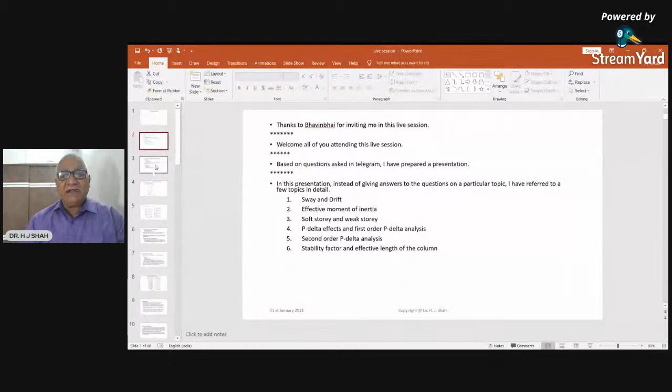When you consider a building, primarily we have two types of loads: vertical loads including dead loads and live loads. Because of this, there will be displacement, and vertical displacement will be represented by shortening in the column. If there is tension, there can be tension elongation. Horizontal displacement of the columns is represented by means of buckling.

There will be horizontal loads also, like wind loads and earthquake loads, and for that the displacement will be horizontal, and that will be the total sway of the building or sway of the column.

For example, if this particular column is subjected to vertical load, you can see there is buckling. This buckling can be small - even for a small load, theoretically there will be buckling. So when the load is small and the height is smaller, this buckling effect may be small, or it may be considerable.

So now these two words are very important: considering small or considering considerable. When it is small, you consider it as a short column, and when it is considerable, you will consider it as a long column.

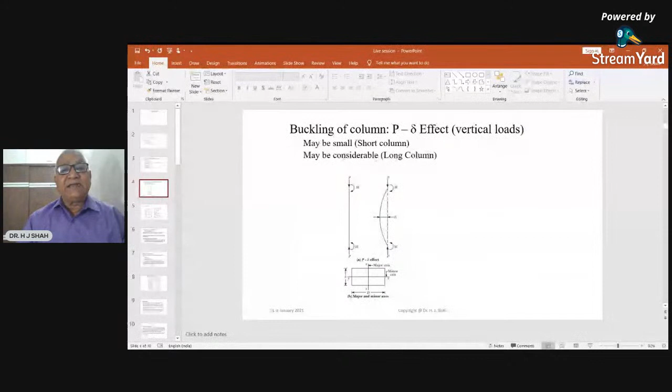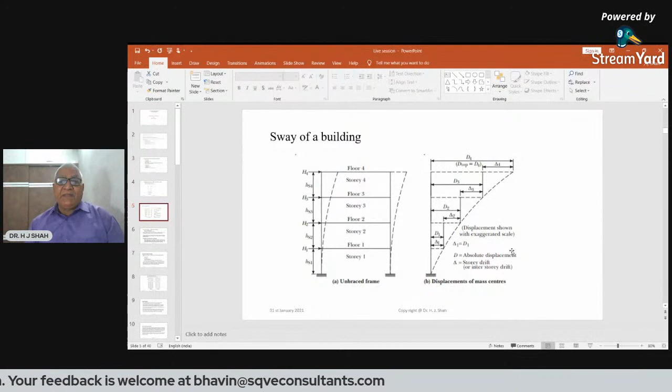You can see whatever these bendings are, D1, the displacements D1, D2, D3, and D4, are called absolute displacement because they are calculated with respect to this vertical line. But suppose if you consider any particular floor, say story number 3, then D3 minus D2 gives you delta 3, and this is called the drift of the third floor, and so on. So this is the meaning of sway.

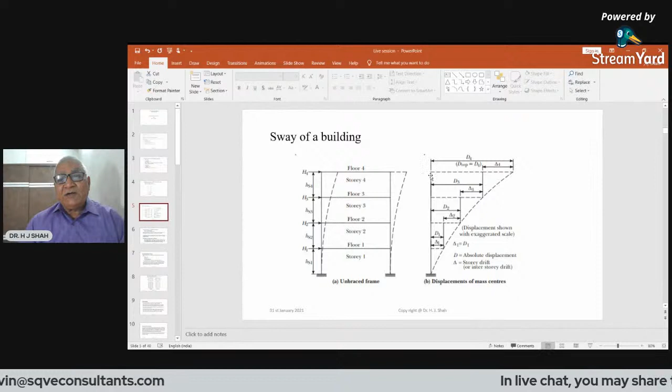Total sway is the sway of a particular point with respect to a fixed point, whereas the drift is nothing but the difference of displacement of the top and bottom of the stories.

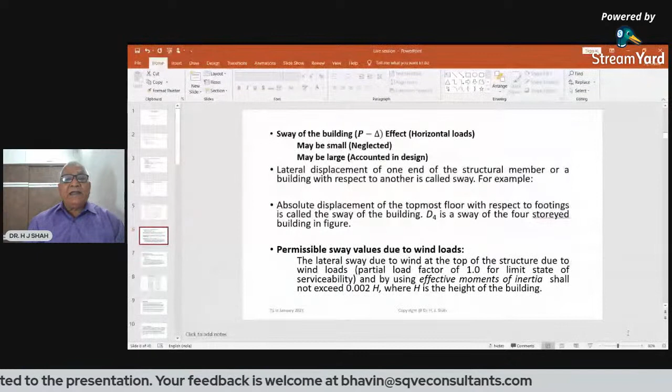This sway may be small or it can be large, similar to the buckling. Buckling may be small and may be large. In the same way, the sway also can be small or it can be large. When it is small, we can neglect it. When it is large, we have to take it into design.

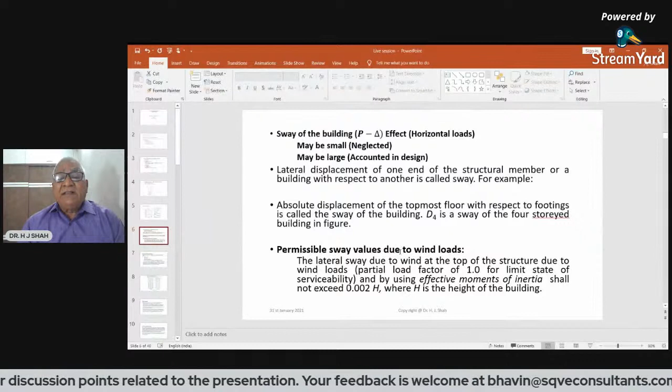So how to consider it? Permissible sway due to wind loads - there are two things. When there is sway, the permissible sway values are given by the code, and I will read: the lateral sway due to wind at the top of the structure, with partial load factor 1 for limit state of serviceability, and by using effective moment of inertia, shall not exceed 0.002h, where h is the height of the building. What does this mean? For wind loads, the code has given the sway limit and not the drift limit. Drift limit is given for earthquake load, whereas the sway limit is given for wind loads.

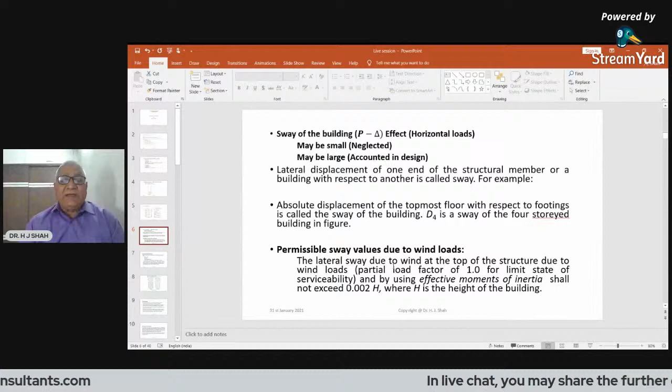So you need to consider the whole building. For example, in this building, the total sway is equal to D4. This D4 should not exceed 0.002h, that is, the total height of the building.

Now the important words are effective moment of inertia and so on. Because of that, we have to discuss the effective moment of inertia also.

There are two other words called braced and unbraced columns, or braced and unbraced frames. Lateral loads acting on the building can be resisted by shear walls, bracings, special arrangements, or other means. If you resist the horizontal force directly, it is called a braced building, and the columns in it are called braced columns.

For example, this building has a number of columns: 3 on the front side and 3 on the back side, with 6 shear walls provided. Under wind load and earthquake load, the shear walls will take all the horizontal loads. Therefore, all the inner columns and the external columns are not subjected to wind or earthquake load.

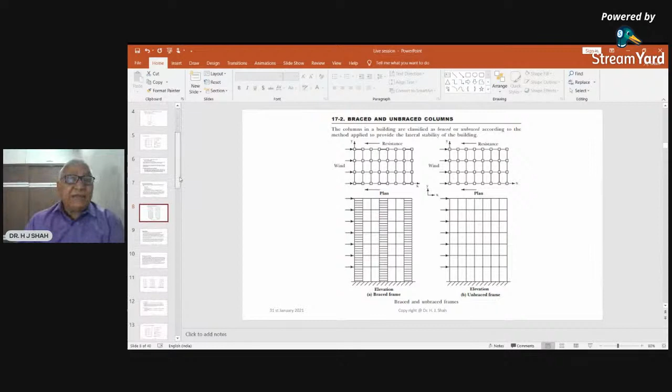When I say braced and unbraced, total sheltering is given or not given. If you consider the sway in the braced condition, it will be zero. In the unbraced condition, it will be maximum, or full sway will be there. In practical columns and buildings, you will hardly find a totally braced building.

How are these loads transferred? The slab acts as a diaphragm. The horizontal loads are transferred to the vertical load carrying elements through the slab, which acts as a large diaphragm. Since the slab has large stiffness along the loads, it can transfer these loads to the columns and walls in proportion to their stiffness.

When this load is applied, for example earthquake loads acting at the mass center, it will be transferred by means of the slab diaphragm. The slab diaphragm, because of its large depth, has a very large capacity and can distribute the load to the vertical elements in proportion to their stiffness.

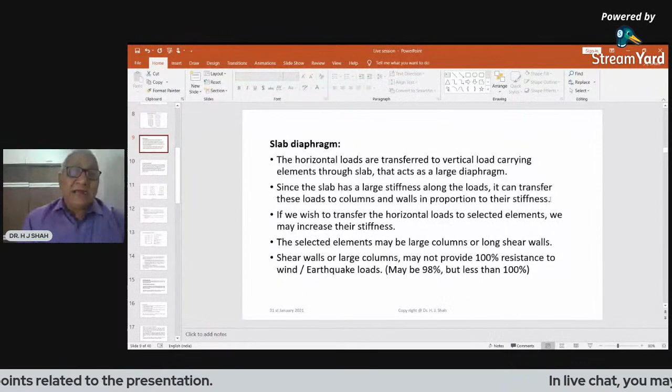If I wish to transfer the horizontal force to some particular elements, it is possible to make the stiffness of those elements very large and the stiffness of other elements so small that they will not take the loads. This is the principle used in braced and unbraced buildings: making the stiffness of some elements so large that the other elements are automatically sheltered.

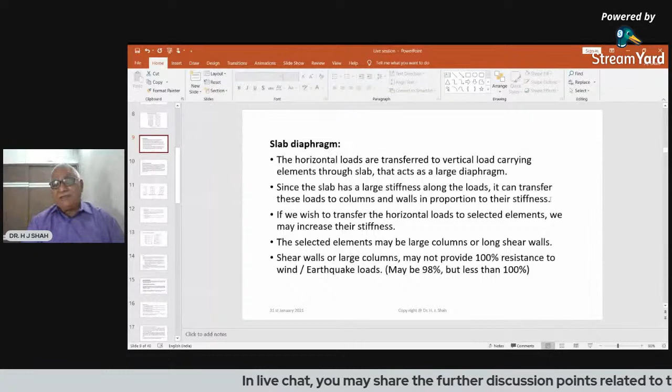For example, when providing a shear wall, its stiffness in the direction of the earthquake load or wind load is very, very large. Therefore, it will take all the loads.

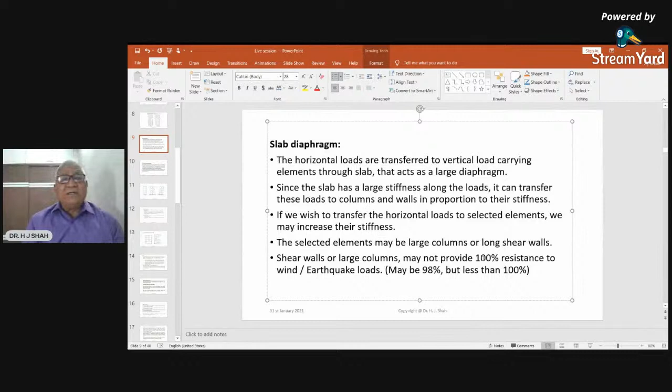Shear walls or large columns may not provide 100% resistance to wind, maybe 98%, but less than 100. We consider that all loads are transferred to the shear walls, but in exact calculation, other elements also have some stiffness. So you cannot say that 100% of the loads are taken by the shear wall; maybe even a small 1 or 2% will be taken up by the vertical columns.

Therefore, the words braced and unbraced are not exactly 100% correct for our practical buildings. So IS 456 has given two different words: no sway and sway columns.

No sway means there will be deformations, there will be a sway, but that sway will be limited. You must remember these words: limited and more, or limited, not considerable. When it is limited, you need not consider it. When it is considerable, you should consider it.

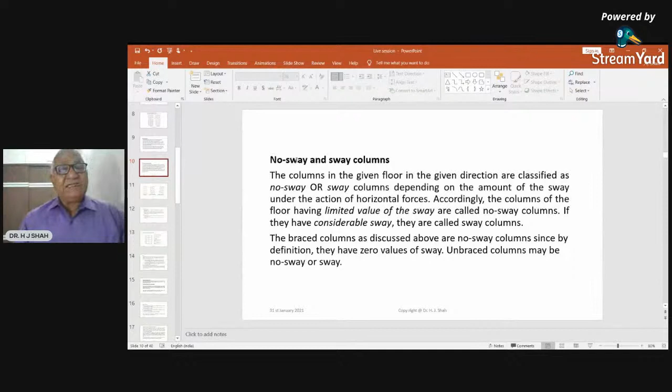So in our buildings, if the sway is limited, we can say the building or the columns in the building are acting as no sway elements. If it is considerable, you can say it is a sway building, or the columns in the building are sway columns.

So instead of telling them braced and unbraced, we may call them no sway and sway columns, or no sway and sway buildings. Here is a presentation of sway and no sway columns.

So you need to consider sway and buckling both. For vertical loads, you need to consider the buckling. Buckling may be considered, or buckling may not be considered.

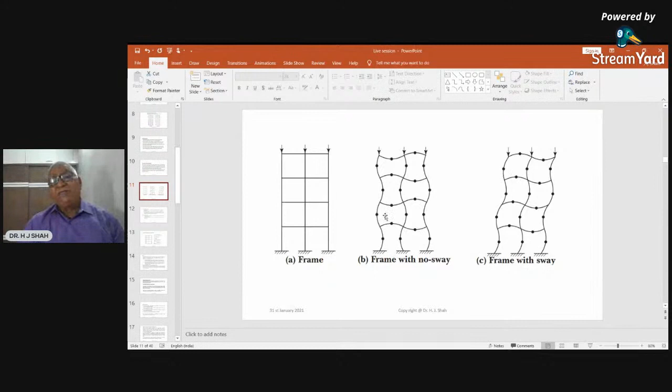With the frame with no sway, sway is limited, and P delta effect due to horizontal load may not be considered. What is P delta effect?

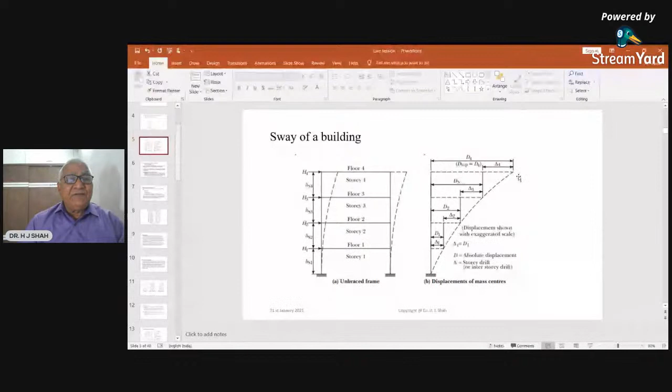That is, when load is applied, there will be a delta. We considered this in the very first slide, that because of this load, there will be a horizontal effect. And the P delta I will explain in the next slide.

Buckling of individual column needs to be checked. If it is limited, a short column, it is neglected. If it is considerable, P delta effect due to buckling needs to be considered.

I am using two different deltas. This P delta, this triangle, is used for the horizontal loads, and this delta is used for the vertical loads. So first you consider horizontal loads, then you consider the vertical loads.

When the frame is with sway, the P delta effect is considerable and you have to take it into account. Even then, buckling should be checked.

Many people are under the impression that when you are checking the P delta effect because of the horizontal load, you need not check the P delta effect because of buckling. But in fact, you need to check both.

First, you go to the horizontal loads, define the building as sway or no sway, and then again go to the vertical loads and calculate the P delta effect of the vertical load also, with the formula given by IS 456.

Again, the horizontal displacements are shown and the drifts are shown over here, just to recollect our past discussion. Now, this drift is very important in multi-storied buildings. Drift is here delta 4, delta 3, delta 2, delta 1. These are the drifts, and they are very important in multi-storied buildings.

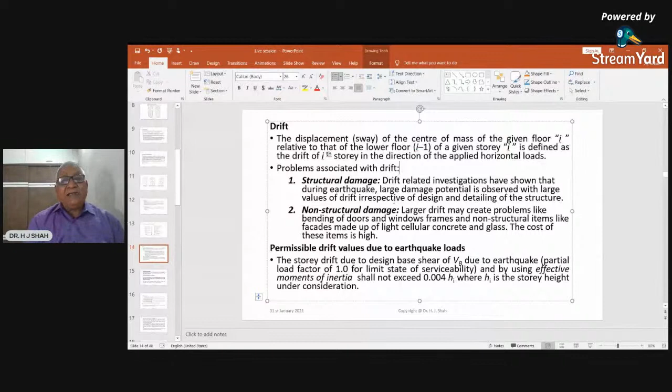Some non-structural damages are there. Suppose you experience large drift in case of earthquake, then you will say that your window is not closing. Bending of the doors happens and you are not able to close it, and so on. So these are non-structural damage, but it will create upsetting in the minds of the occupants.

The drift is specified by IS code in case of earthquake and not in case of wind. For wind, sway is considered, and for drift, earthquake drift is considered, and it should not exceed 0.004 HI, where HI is the story height. And here also it is said to use the effective moment of inertia.

So this we have already discussed.

This drift we are considering can be calculated, and it may be due to different points. Due to rotation of the columns and girders, it is known as bent action or displacement drift. Due to cantilever action of the space frame, known as chord displacement, meaning the whole building acts as a cantilever. Due to shearing action of the lateral loads, known as shear leak displacement, and second order displacement due to P-delta effect. These are the four things you can summarize.

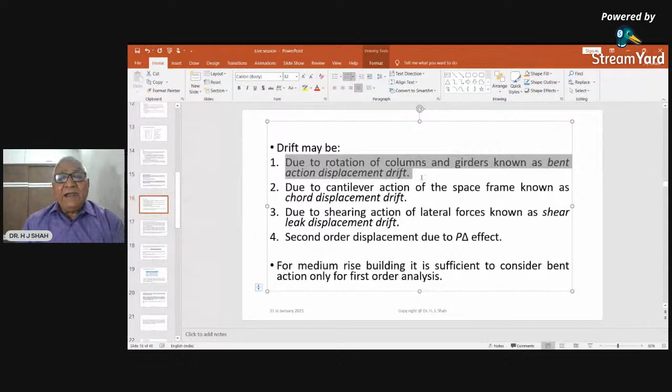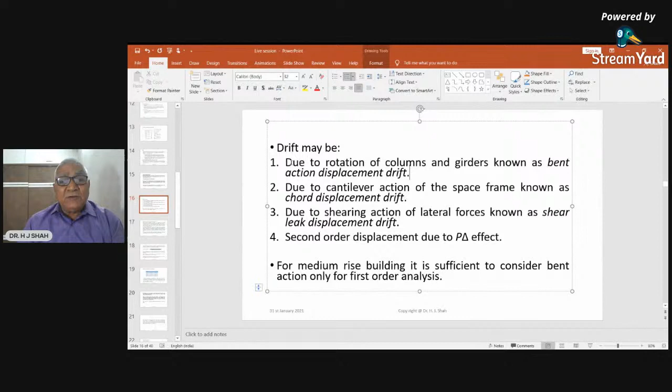The code, while defining sway and no-sway columns, says you need to consider only the first order drift. These are second order, third order, different ways of calculating drifts. When calculating drift manually using first order analysis, versus when software considers all points, the deflection or drift given by software is actually larger than what we calculate manually.

Now what is effective moment of inertia? When analyzing the building or frame manually, we consider the frame and calculate distribution factors at all joints. For finding the distribution factors, we consider the moment of inertia of beams and columns as 1 by 12 BD cube, or 1 by 12 BFD cube into KT etc. for flange sections and so on.

Now the concrete, when you start loading, suppose there is zero loading, there is no crack. But as you gradually apply loading, a crack will start. When the modulus of rupture is attained by the concrete, there will be a sudden crack, and then forces will be transferred to the reinforcement. Remember, forces are not transferred to the reinforcement without a crack. So there will be a crack.

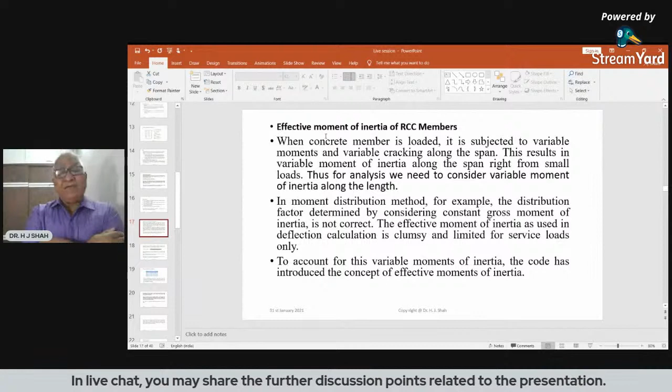As you go on increasing the loads and moments, the crack will definitely increase more and more. Since we are not considering this crack in analysis, whatever concrete is cracked should not be considered in the moment of inertia. Therefore the moment of inertia of the beam or column will be reduced. This reduced moment of inertia is maximum at the center, meaning maximum reduction is at the maximum bending moment, and lower elsewhere. So the moment of inertia, even when reduced, is not constant throughout the beam.

Suppose I want to calculate the distribution factor with respect to the moment of inertia of an uncracked section, then definitely I am wrong because the distribution will not be correct. So for proper distribution, considering real failure due to earthquake or wind, how much cracking will be there? To account for that, we have to consider the effective moment of inertia, and that effective moment of inertia is given by the code.

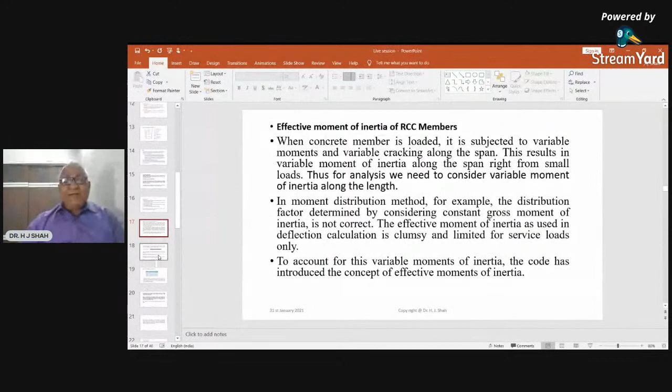So we have effective moment of inertia of the section divided by gross moment of inertia of the section, defined as a section modifier. The section modifiers are given by the code in a table like this. This table is given by IS 16700, and it gives section modifiers for slabs, beams, columns, and walls differently. Here, two different things are there: one is unfactored loads and another is factored loads.

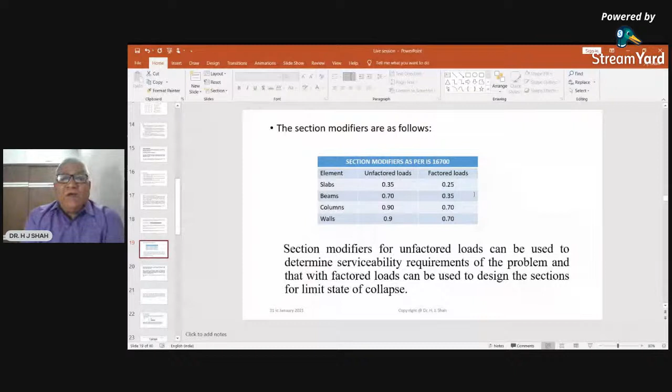What does this mean? When finding properties like drift and displacement, they are calculated with respect to serviceability conditions, because deflection of a beam and displacement of a frame are nothing but serviceability conditions. For that, we check with respect to unfactored loads. When calculating factored loads, meaning limit load condition, you load it for 1.5 or 1.2 times the total loads, and then factored load comes into picture. The moment of inertia will decrease further, giving smaller section modifiers for factored loads. So it should be clear that serviceability conditions have these modifiers, and limit conditions have different modifiers.

What does this mean? That you need to prepare two different models. If you are using the software, then you need to prepare two different models, one for serviceability condition, another for factor load conditions. Now what is better?

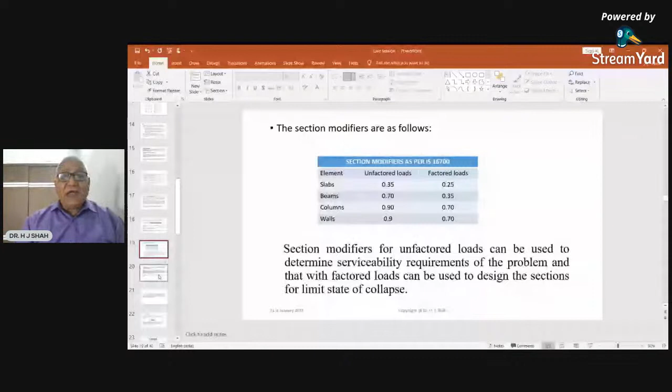First of all, create the model with respect to factored loads. It means you apply these section modifiers with respect to the factored loads, and you calculate the bending moments. After you completely run a successful design, then you say that yes, model number 1 is okay, and that is what we are doing up till now.

Now the same model will be considered as model number 2, and you change the moment of inertia, and again run the model for serviceability condition, and then you will be able to check for deflections, drift, etc. So you need two different models, one for ultimate load means limit state condition, another for serviceability condition.

There is tremendous confusion amongst people using section modifiers, and therefore I have cleared that IS 16700 is giving you accurate or perfect conditions. Now when talking about medium rise buildings like 6-story, 7-story or below 50 meters, the code considers that unnecessarily making two different models and increasing labor work in calculations may not be justified, so some relaxation may be given.

Therefore IS 1893 says that when you are checking drift for earthquake loading, you may use the section modifiers for ultimate loads or the factored loads, and find out the drift. Now what will happen? The displacements will be more because of the lower moment of inertia.

But at the same time, the code gives you a relaxation that you can use the unscaled seismic loads as obtained from the response spectrum method. This is a very important point, and you need to be clear about this. Many queries have been raised for this.

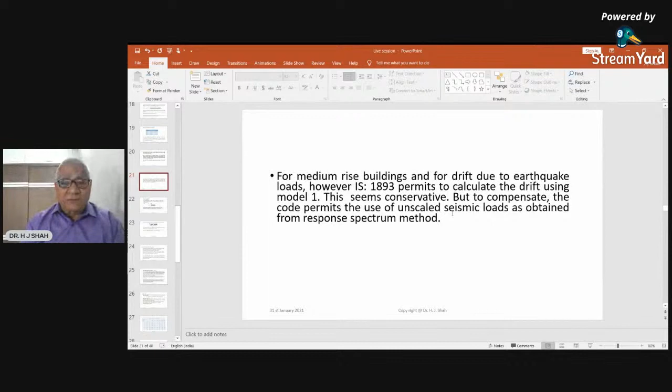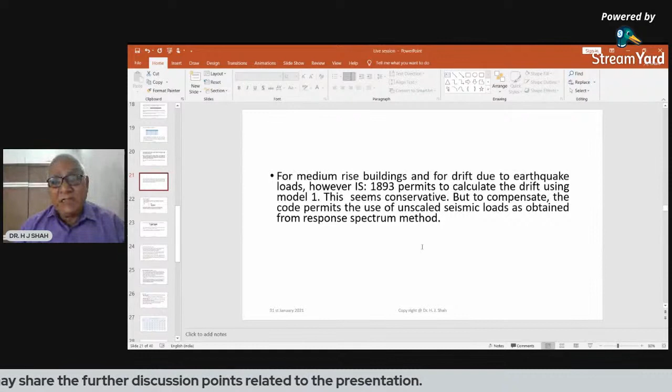Please remember, first of all in this response spectrum method, whatever loads at different stories you are getting, they are unscaled seismic loads. You multiply it by the seismic scale factor, and it becomes scaled seismic loads. And when you multiply it by the partial load safety factor, 1.5 or 1.2 etc., it becomes factored loads.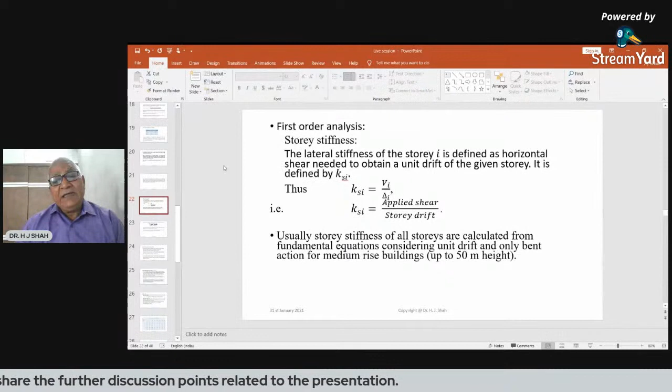Now we need to calculate the story stiffness. The story stiffness, for first order analysis, is defined by the story shear divided by story drift. I have already given an example of how to calculate story drift, that the difference of displacement at top and bottom is called the story drift. So this formula comes out to be applied shear divided by story drift, which gives you the story stiffness.

However, you can also calculate the story stiffness by theoretical conditions. The story stiffness is given by moment of inertia, because it is a property of the frame or story. So you can calculate the story stiffness by this formula. For derivation of this formula, you can refer to my RCC volume 2, where it has been derived. Please remember, this is only for bent displacement, not other.

This is used only for the first order analysis. So for each and every story, when I apply this formula, I can find out the story stiffness for each story. And when I want to find the drift of that story, I can apply this formula and find out the drift of the respective story.

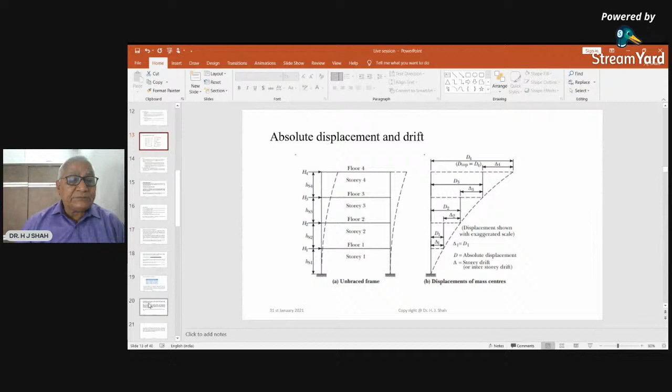Now we have already calculated the stiffness of the story. Some particular terms related to the stiffness are discussed here, called stiffness irregularity, and we call it a soft story. Now how to calculate it? Calculate the lateral stiffness of all stories. So if suppose there is a 7-storied building, I will calculate the story stiffness K1, K2, K3, K4, K5, K6, and K7 for all stories.

If an RCC shear wall is provided, it may be treated as a column for calculating the lateral stiffness of the story. This is for the first order analysis, and therefore you may consider this as a column. Otherwise, you need to consider some more effects also.

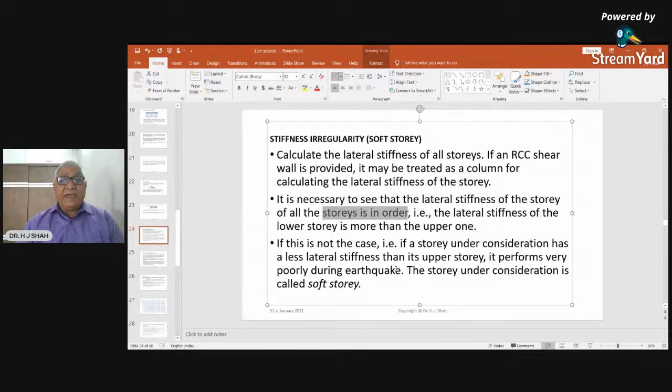It is necessary to see that the lateral stiffness of the story of all stories is in order. This particular word you need to remember and understand clearly - what we mean by order. In order means when I go from lower story to upper story, say story number 1, then 2, 3, 4, 5, 6, 7, the stiffness of story 1 should be maximum. In 2 it can be equal or lesser. In 3 it can be equal or lesser. In 4 also it can be equal or lesser, and so on. That is called in order. So the story stiffness of the ith story should be either more or equal to i plus 1. That is called in order.

Story stiffness in order - if it is in order, it is all right. If it is not in order, say for example the story stiffness of the third story is more than the second story, then we call the second story a soft story, and the soft story should not be there as per the code.

Such a situation is observed in ground floors with open story, that is no masonry infill in the ground floor. In some 3-4 story buildings, what we do, the ground floor is meant for parking, and therefore we don't provide the walls. In the upper floors, we have masonry walls, therefore they are acting somewhat as a shear wall and increasing the stiffness of the story.

So we may have a lesser stiffness in the lower story like this. One more thing is that usually what we do is keep the story height lesser in case of parking. You must have observed that parking stories are about 7 feet high and the upper stories are 10 feet high. This particular point we are taking into account in our design, because if I consider 7 feet height, then that stiffness will be increasing because of the smaller length. Still, if the stiffness is lesser in the ground floor, I need to provide shear walls at 1 or 2 locations to increase the story stiffness. So the soft story should not be there.

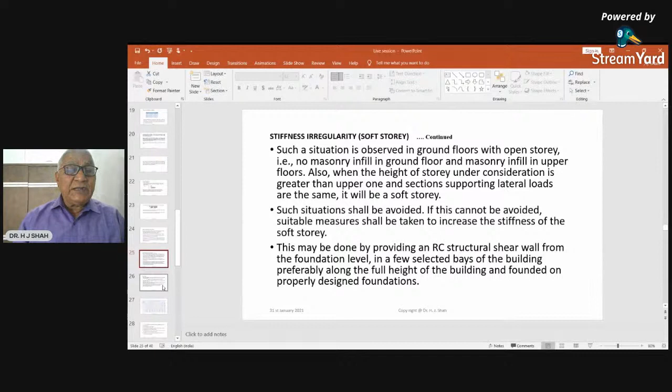Again, come to the story drift. Now we have already calculated Ksi for every floor. So whenever you find out V, that is the shear force of the story, you are able to calculate delta i.

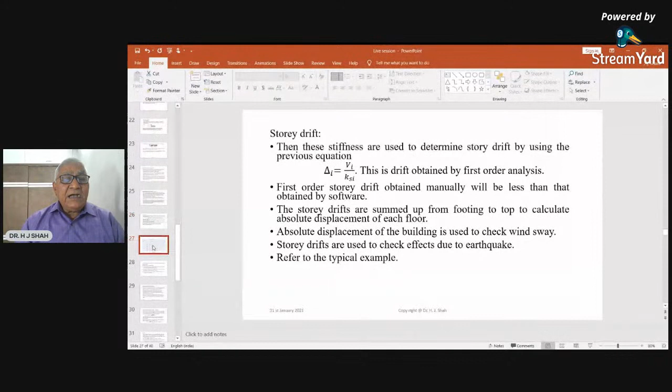This is one small example. This is a first order analysis of a 7-story frame.

Now when I speak of story, there is a lot of confusion about it. When I say I have a 2-story building, then you understand there is a ground floor and a first floor. When I say 5-story building, there is a ground floor and 4 upper stories. But when we calculate our columns, we are providing ground beams or ground slabs at the ground level, so there is a column below that also, or there can be a basement also. So we consider the basement story as 1 story, or if there is no basement, then from foundation to the plinth level, we call it 1 story.

So that will be called story number 1, story number 2, and so on. So a 6-story building, as we speak in general - ground floor plus 5 upper stories - means it is a 7-story building as far as our calculation. Now here the stories are written, hi is written, and this is P. P is a vertical load.

All columns, suppose there are 16 columns, so the sum of all 16 column loads is 6,000. In the 7-story building, these are the loads, and in the first story, that is the basement story, the load is very small because here there is no slab, no live loads, etc., or maybe directly transferred to the ground, and the load is only some masonry and so on. So the load is very small. In the last story, because of the terrace, the load might be smaller.

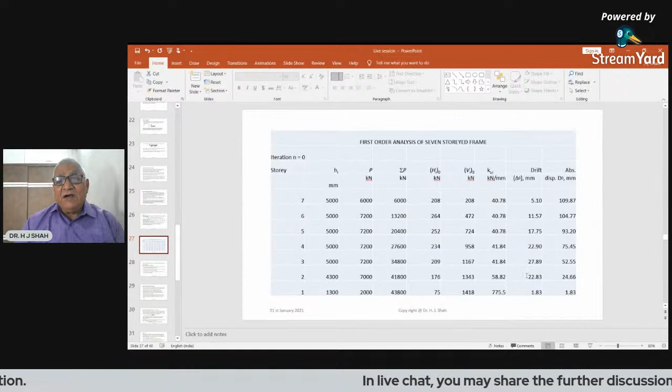It is lesser, then it is increasing, and here now it is decreasing. Why is this decreasing? Because the story stiffness may be larger. You can see here the story stiffness, instead of 40, it has become 58.82. Why? Because the height is reduced, and therefore the story stiffness is increased.

Okay, then after drift, you start from the bottom. This 1.83 is the displacement of the ground story, and then just go on adding: this plus this is this, this plus this will be this, and so on. So just go on adding the drift, you can calculate the total displacement.

For earthquake, you need to consider this drift. Say, for example, if there is a fourth story and the height is 5,000, 0.004h is equal to 20 millimeter, the drift of this story is 22.9. It means it is not satisfying the drift considerations, and therefore you need to make some arrangement on this building so that the drift is well within the limits.

Similarly, you can calculate the total height over here, and then you can divide it by 500 and then check whether this is satisfied. If it is wind load, you need to consider the last column and this value only; if it is earthquake load, you need not consider the last column. Then divide the total height by 500 and compare with 109.87. If it is less, then it is all right. If it is more, then you need to change the dimensions of the beams and columns so that it will fit into this criteria.

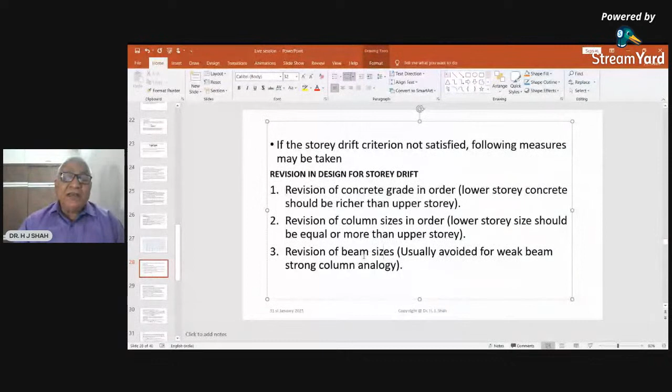You can increase the beam size slightly, but usually we avoid this because of the criteria of weak beam and strong column analogy. If you are increasing the beam sizes, the beam moment of inertia will increase and the beam capacity will increase, and therefore it will become a strong beam weak column analogy.

And you need to again increase the size of the column or reinforcement in the column. So when you go in order, you will be able to find out the solution for the drift. We have already calculated the drift, and at the same time we need to consider the strength also.

The weak story is defined such that the shear strength of the upper column should be lower - it should be gradual, meaning the shear strength of the lower story should be larger than the upper story. That is called order. If this is not observed, then it is called a weak story. Up to this is given in the code.

Now, how to calculate the shear strength of the story? Suppose there are 16 columns in the story, and you want to check the shear strength of the total story. To calculate the shear strength of any section, you need to calculate the reinforcement percentage and tau c. In column, you consider the tension side, meaning half the reinforcement, and find out the tau c, and that tau c might be different for different columns. It means the procedure is really cumbersome.

At least in this particular example, what we are concerned with is to consider the relative strength of the columns. So instead of calculating the percentage of reinforcement and tau c etc., you just consider the column sizes. The presence of an axial compression to some limits increases the shear strength of the concrete - this also you need to consider when you are exactly calculating.

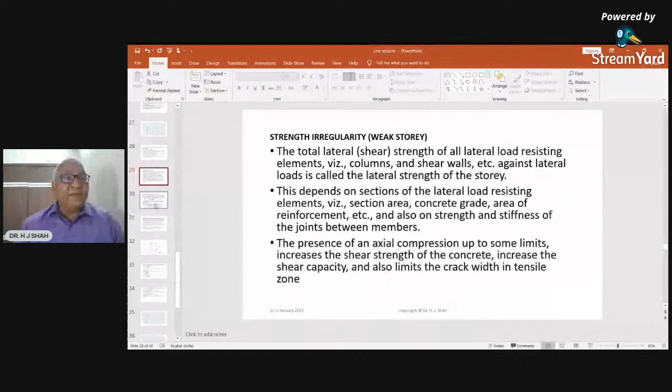Now in the code itself, 13920, some formulas are given for what strengths you have to consider. Where I have taken this formula, for this example I can revise it like this: the shear strength is proportional to the square root of the concrete grade. I can calculate FCK, under root of FCK into area for each column.

If the concrete grade is the same for all columns in the story, the formula is further simplified. If the concrete grade is 30 in 8 columns and 25 in others, then you need to check separately. By this simple formula, it is possible to calculate the shear strength of the given story, and then you check it.

For example, if there are 500 by 500 size columns and 25 grade concrete, then the lateral shear strength of the story is simply 16 into under root 25 into size of the column, that is 20,000 kilonewton. This simplification is made because we are interested in checking the relative strength of the stories.

Now let us come to the P-delta effect. When you are considering flexible structures subjected to lateral loads, the resultant drift will also displace the vertical loads.

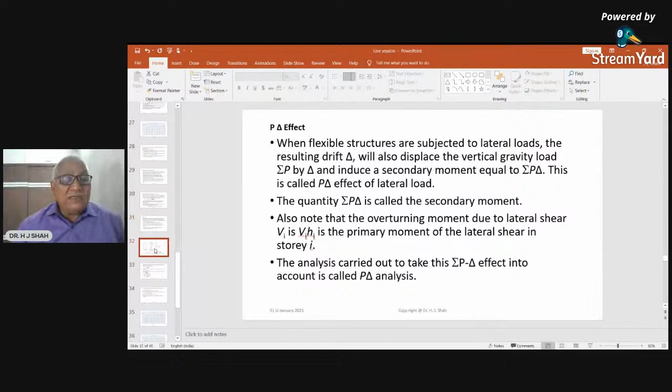How? See here - say this is a story or a column, this is just a representative line. Initially HI and VI, where I means the i-th story, HI and VI are acting over here. What is HI? HI is the story load and VI is the story shear - we have already defined it.

Because of this, there will be a horizontal displacement, that is delta I0. This is a first order analysis - delta I0 we have already calculated. Now this is a very exaggerated sketch, therefore you can see this angle also. Remember that this angle is hardly 0.1 degree or even lesser than that.

So what will happen is that there is a displacement of the load. The load is vertical, and you can see that this particular story or column is subjected to a bending moment of sigma P multiplied by this distance. Because of this horizontal load, there is a sway, and because of this sway, the vertical load of the column is displaced by the drift. Because of this displacement, the vertical column loads, gravity loads, will induce some moment over here.

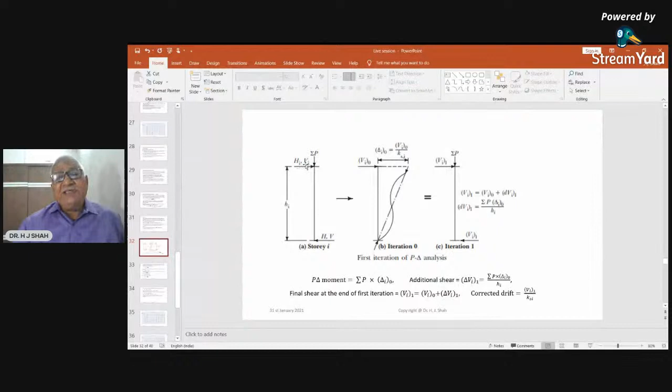Suppose this moment, whatever the moment is, I want to balance it by means of a couple like this. This is a couple, VI1 is a couple, and this couple moment must be equal to the moment induced by this. So here P into delta I0, that is delta 0. Then additional shear - the original shear is VI, but because of this additional moment, VI1 is also added. So additional shear will be VI0 plus delta VI.

And what is the corrected drift now? The drift which was delta I0 over here, this was delta I0 here. It will now become delta I1. You can say delta I1 here. So the drift will be changing.

Now suppose the drift is changing and again you are applying this load. Then also again there will be a moment. So this procedure will continue. You just go on correcting the drift and changing the shears. So finally what will happen?

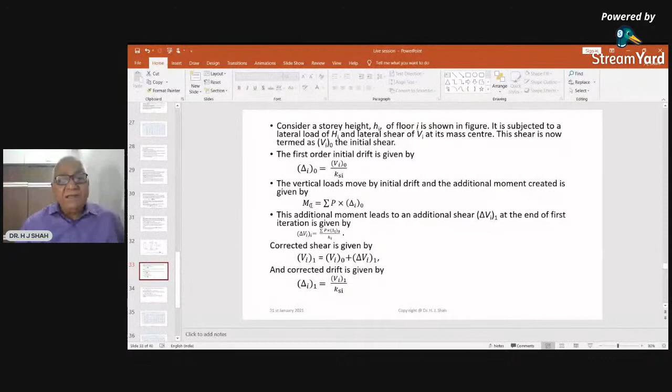There is a VI initially. At the end of the first iteration you get VI1. At the end of the second iteration you get VI2. At the end of the third iteration you get VI3, and so on. That is what is explained here, that over the first iteration you are getting delta VI1, and similarly with another iteration you can get more and more shears.

Now see, if you are continuing for n iterations, you get VIN equal to VI0 plus delta VIN. Now when do we stop? We will stop this iteration when these two are very much nearer. It means very much nearer means what - we consider a difference of 5%.

See this calculation - this is a manual calculation of the second order analysis. This is iteration number 1. The original one we have already considered over here, for the same story, this building. This is a first order analysis, and we have calculated the drift delta 0. With this now, I am increasing, considering this one - this is a second order analysis.

Whatever additional moments are created, because of that we are calculating the additional shears and then finding out the final shears. So here the hi is written, sigma P. This delta 0 is from the first table. This additional is calculated over here, this delta, and then VI additional is calculated, VI1 is calculated, and the revised horizontal drift is calculated. With this drift, you are calculating revised drift delta 1 and absolute displacement, the same table, but we are now adding this VI0 into this additional shear and calculating VI1, and we are calculating absolute displacement again.

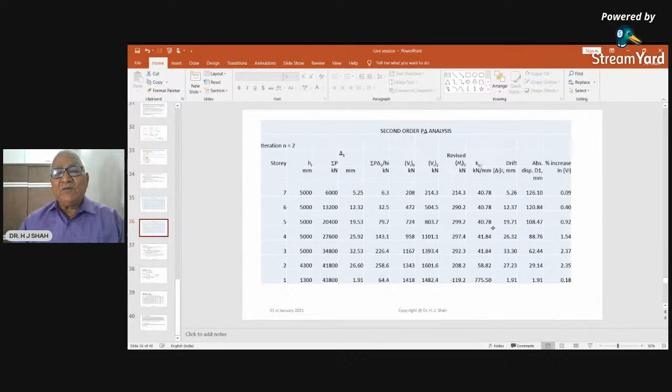So now again go for the second iteration. You go through exactly the same things, revise it, and go on for the second iteration and find out the percentage increase in the shear. You can see here that the maximum is 2.37, which is less than 5%. So now we stop here for n equal to 2.

And whatever we have finally calculated, this revised H here, you can see revised H. With this revised H, you can consider your building and find out the other factors or shears and moments and so on, and this percentage increase should be well within 5%. So this is about the first order and the second order analysis for the drift.

Now we have already seen that we have two different moments, that is sigma P into delta. Sigma P is a gravity load and delta is a drift. When this drift - the code says that you can consider this first order drift, that is to say this first order drift, this drift. So this sigma P and this drift.

Suppose I am considering story number 5, then sigma P is 20,400 and the story drift is equal to 17.75. This is because of the gravity load.

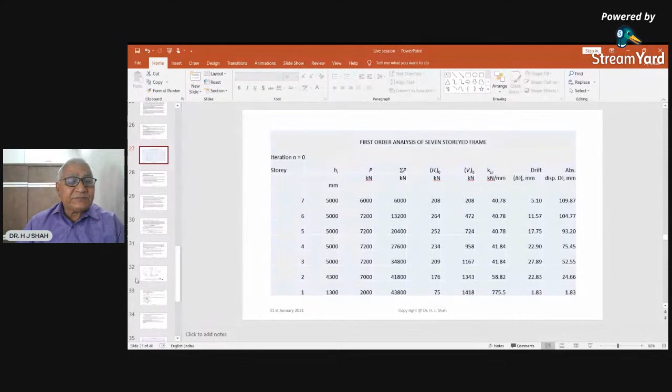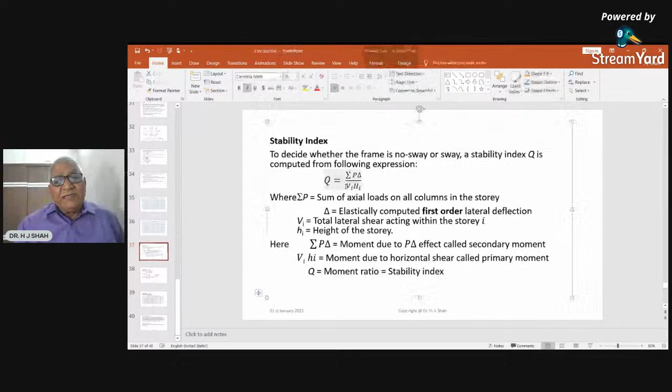At the same time, we also have another moment, Vi*Hi, that is a horizontal load and Hi is the height. So this is a primary moment and this is a secondary moment. We are checking for the horizontal loads. Therefore, the moment created by the horizontal load is a primary moment, and the moment created by the first order and second order displacements is called the second order moment.

The ratio of this moment is called the stability index. This is defined by the code. In IS 456, this formula is given, and in IS 16700 also this formula is given, but the nomenclatures given by both the codes are slightly different. It is expected that new editions of the IS will take care to have the same kind of nomenclature across codes.

So the ratio of the second order moment to the primary moment is equal to the stability index. Now why do we calculate the stability index? It is an index of whether we consider the displacement to be within limits or considerable. Initially, in the very first slide, I told you that you neglect it if it is less. You cannot neglect it when it is not less. So this stability index will tell you whether to neglect it or not.

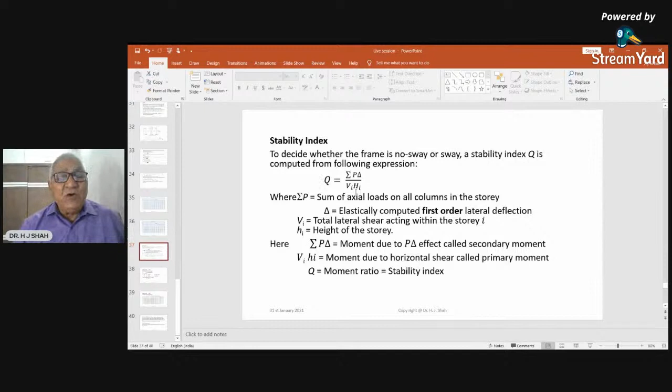The code says that if the stability index is less than 0.04, you can say it is a no-sway frame. If it is greater than 0.04, you can say it is a sway frame. And by definition of the braced frame, Q is equal to 0. Therefore, all braced frames are no-sway frames.

IS 16700 gives one more limit: this Q may be less than 0.04 or may be greater than that, but cannot be more than 0.2. Here we have calculated an example of just a 7-story building. But when you are calculating a 20-story or 30-story building, you need to check that this Q is not greater than 0.2. Otherwise, you need to increase the sizes of the members.

For the same example, I have calculated the stability indices here. The height, sigma P, Vi, drift, and the stability index are calculated. You can see the stability index, and then you can classify that in this 7-storied building, the other columns are sway.

It means when you are calculating the effective length of the columns locally, when designing another column inside, you need to consider the columns of the 4th story, for example, as a sway column. To calculate the effective length of the column, the code has given two different charts, one for no-sway and another for sway buildings.

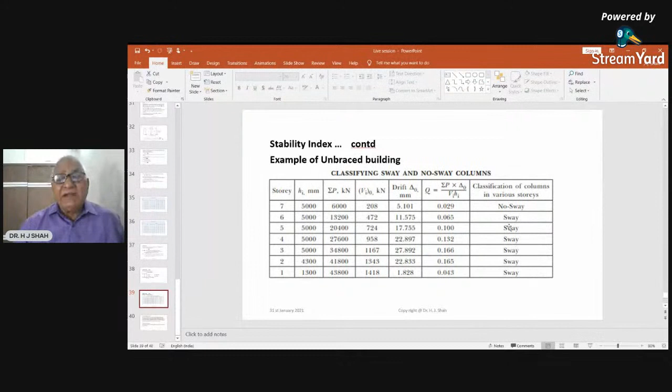For no-sway conditions, the effective length factor is less than 1. For sway columns, it is always more than 1. The code also recommends that the effective length factor for sway columns should not be less than 1.2. So the minimum effective length factor you need to consider is 1.2. This is the effective length of the column.

This is the first part of my presentation, which I have completed. Now we shall go to the question and answers.

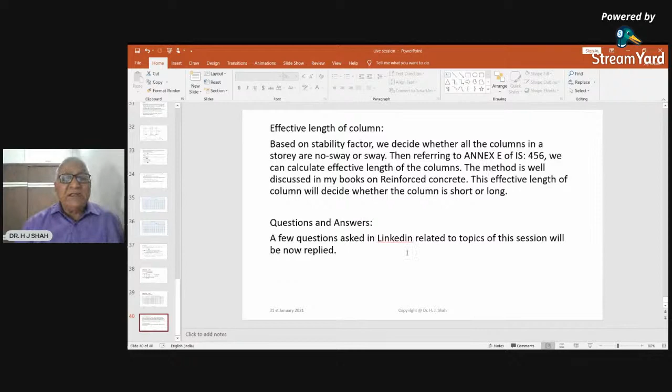Yeah, it was an excellent presentation. Okay.

Focusing on all the practical difficulties being faced, like P-delta analysis, stability index, and drift consideration, we have a few interesting questions coming up. Let us take them one by one.

Concept of release and fixity, and transfer of moments in beams. I think you want to consider the relative moment distributions between the two, whether you consider fixity or not.

When the members are monolithic, instead of the word fixity, I think the word framed is more convenient. What do we mean by fixity? Whatever moment is created is transferred fully into the member. For example, there is an RCC wall and a small beam protruding out of that—that can be considered as fixed, because all the moment will be transferred to the vertical shear walls.

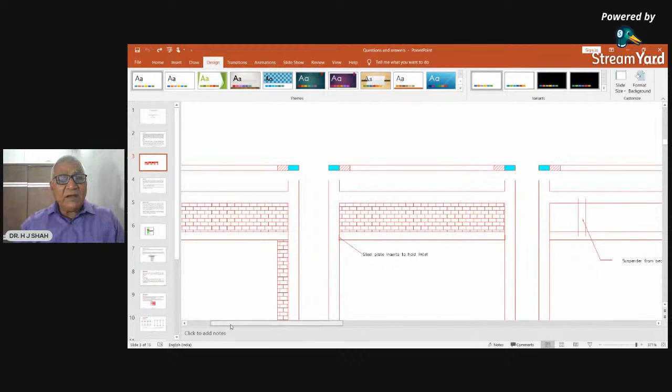This is the situation, I think, what you want. These are the two columns, one here, one here, and you want to provide lintel for these three windows. The first solution is that you have these walls and you just support this lintel over these walls. In most buildings, we follow this, and this masonry can very well take up the loads of the upper masonry, because the other loads of the slabs will be taken up by this beam.

Suppose this is not possible and you have a building like this. You want a full story, you want a full opening. If possible, then you can just create two small vertical walls over here, and over this you can support it.

Even if this is not possible, then go to here. In this case, I have provided two insert plates in the column here and here. While casting the column, we provide the insert plates. After you remove the formwork and the column is strong enough after 7-10 days, you can weld two angles over here, and from those angles you can support this lintel.

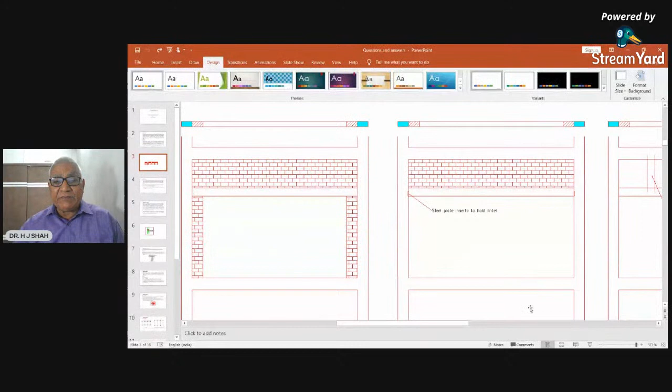If suppose this is also not there, then many times we have suspended the vertical bars from the upper beam, and consider the lintel supported by these two suspenders.

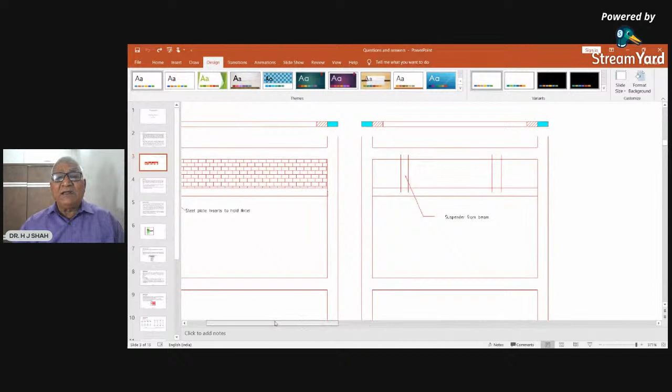These four things we have already done successfully on site. And suppose anything is not possible, then there is no alternative, and you need to go for the short column effect. So there is no alternative. These four alternatives are shown to you, and if it fits your condition, go for that. If not, then again you have to consider it.

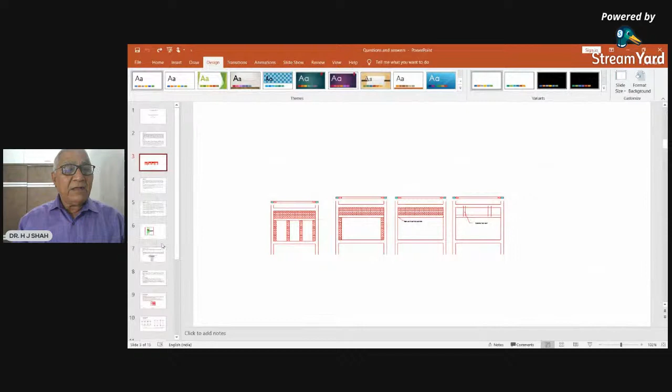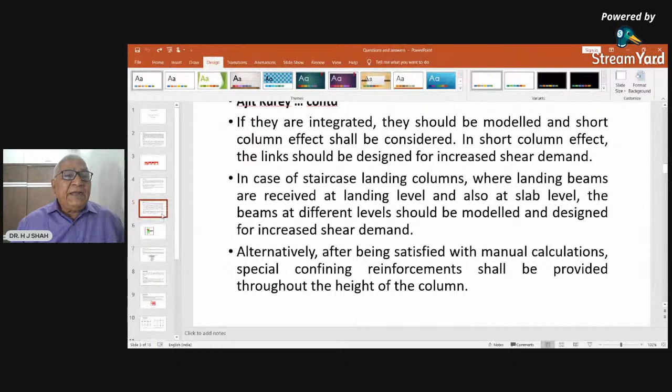Okay, if this is not possible, then you have to provide a beam at the mid landing. It means the columns are having the effect of short columns. In this case, what we prefer is we actually design them for shears, and in most cases, if you go for special confining reinforcement throughout the length of the column, it is all right. You can check for 2-3 cases, and provide it for the whole length of the column. After being satisfied with manual calculations, special confining reinforcement shall be provided throughout the height of the column. So if it can be avoided, you can avoid it. If it cannot be avoided, then you have to consider it.

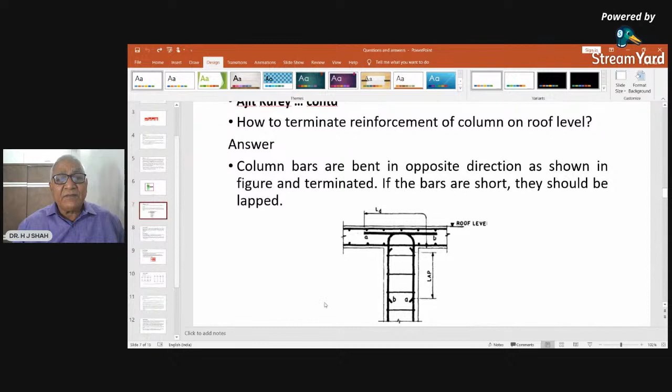Next question is how to terminate reinforcement of column on roof level. This is a column shown over here, and the reinforcement is taken on this side, and this reinforcement is taken on the other side, and this distance is equal to LD. This is equal to LD. So by this way, you can support the column. Now, suppose if you have forgotten to take the length of the reinforcement up to this point, then say this is that case over here. Then you can even lap the reinforcement and stop or terminate the column like this.

This is a figure from SP 34. More details you can even get from the same code.

See, one thing is, providing a floating column is not a crime. The crime is when you are providing a floating column which is unengineered. And that is why the code also restricted it in certain cases.

You can see the code suggestion as per IS 1893 Part 1. The floating columns are likely to cause concentrated damage in the structure and are undesirable. It says that it is undesirable. You may not provide it, but it does not say that mandatorily you should not provide it.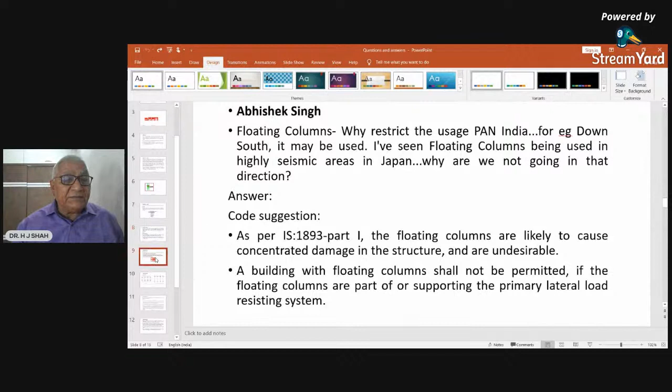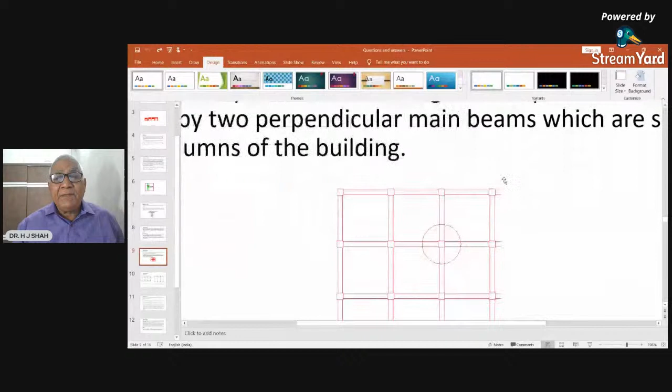Suppose this is a building and I do not want a column over here. These are all the lateral load resisting system. So what I can do, this column can be erected from this beam and this beam, providing a foundation for this floating column in both directions.

Whatever the vertical loads are there, what are the moments? If there is an X moment on the column or Y moment in the column, alternatively they will be taken up by moments in the beams. Suppose I provide only one side beam, then what will happen? The perpendicular moment will be acting as a torsion.

Over here, this particular column is considered as a floating column, and skillfully adopted so that these four members are primarily the lateral load resisting system. You can provide this kind of floating column. But when the code says you can provide the floating column, people will try to provide the floating column anywhere.

Just like a slab beam, which we are not able to discuss today in detail, but when somebody says slab beam, yes, it is even better than beam. People have something in their mind that the floating column can take the load, so it can take a smaller load, 5 ton, 10 ton, but it cannot take 100 ton load, and you should not let it. And that is why there is a red light.

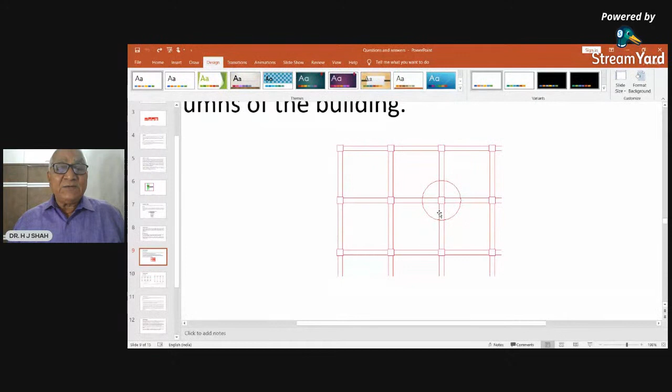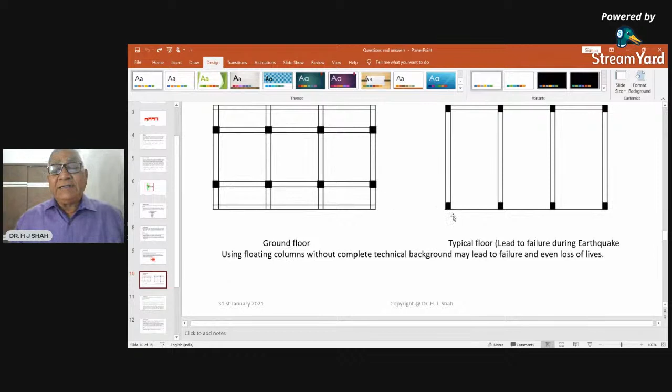Say, this is a red light. This is a particular building at ground floor, from that the cantilevers are taken. In the first floor now, all 8 columns are omitted and the columns are taken outside. Now you can see that these columns are taking the loads of 10 stories above.

Now what will happen is that these columns are not supported by the lateral load resisting system. So what will happen to this particular building? It has to fail in case of an earthquake. And this is not a particularly created problem, it is a real problem.

In one building at Ahmedabad on 26th January 2001, I had personally seen the failure of this kind of building where the floating columns were like this, and over these columns number of stories were supported. So the red light is that the floating column is not always a solution. As far as possible, as a good engineer, you must try to avoid it. When you cannot avoid it, you can provide it only for very small loads.

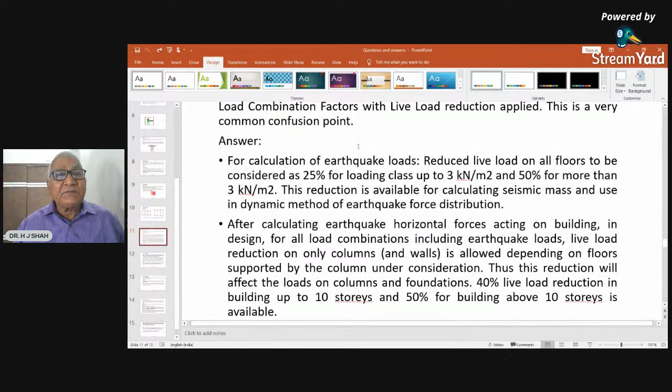Next question is like this, read by Abhishek Singh: load combination factors with live load reduction applied. This is a very common confusion point, because the earlier IS 1893 and this one have some different things. People who were acquainted with the old one may not have read this clause, and therefore they will have some confusion in their mind.

Now, according to the latest code, for calculation of earthquake loads, reduced live loads on all floors are to be considered as 25% for loading class up to 3 kN per meter square and 50% for more than 3 kN per meter square. This reduction is available for calculating seismic mass and used in the dynamic method of earthquake force distribution. So when you are calculating the seismic mass and the actual seismic force or earthquake force acting on the building.

So up to that calculation, you can use this reduced live load. But after you calculate the earthquake loads at each story, and when you are actually designing it, when you are combining it with the dead load and live load combinations, then you need to consider the actual load.

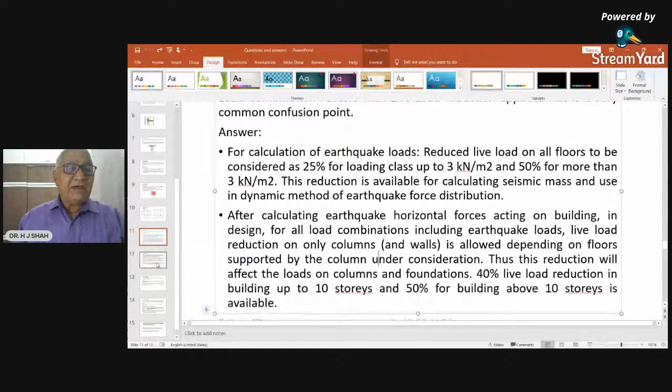This particular question was there in Telegram once, that why is this software giving me an option like this. So this option is given because the main software cannot use 10, 20, 30, 40% reductions, but at least in foundation you can go for 40% or 30% live load reduction. So I think the confusion of many people will be cleared.

So the same thing is discussed over here, that definitely there is confusion because the two IS codes are stating different things.

Yes, I am asking you and requesting you that as far as my knowledge, STAAD is not taking into account this reduction. But if suppose any other software takes into account this 10, 20, 30, 40% of live load reduction in design of the story column, please let me know. Also, if any software is designing columns as per strong column weak beam analogy as per IS 13920, please let me know.

STAAD at present is not designing considering strong column weak beam analogy. Presently, it gives you corrections that if suppose you have applied the size of the columns etc., then STAAD checks it, and at the end it gives you that this particular column is a fail or a pass. But after failing, it does not give you a solution that okay, it is failing and therefore you can do it this way or that way. If another software is giving you such kind of things, please let me know.

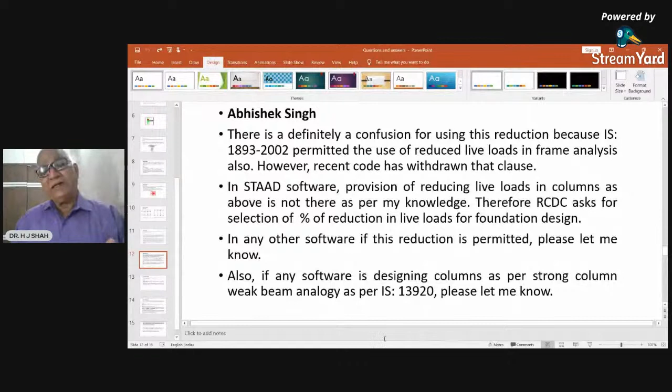The second question is from Professor Himmat Solanki. Why was ductility not included? How do long columns behave with respect to drift and ductility? Now see, this is a very short presentation and many things cannot be included, so we limited this presentation to certain restricted areas. Ductility consideration itself is a wide topic and was not included due to time limits.

The next question is, when moments due to buckling, additional moment as per IS 456 are added to the design, is it similar to the short column? Are ductility requirements also the same? See, the ductility requirements are not different for short and long columns, they are the same for both. As per 13920, no distinction is given.

The next question is also from him. What is the definition of the hidden beam? In a flat plate design, column row reinforcement for 1/4 of the span can be considered as a hidden beam. Now, this particular term hidden beam was included in this discussion only for this reason, that many people are not exactly conversant with what a hidden beam is.

Sometimes in earlier periods, if suppose I want to support a heavy concentrated load like a partition wall over the slab without providing a real beam, then the code says that the concentrated load should be considered over a wide area, and formulas are also given. So if you consider that wide area and provide additional or more reinforcement into it, that is the solution for that particular example. But many people thought that if the load is something more, let us provide a hidden beam.

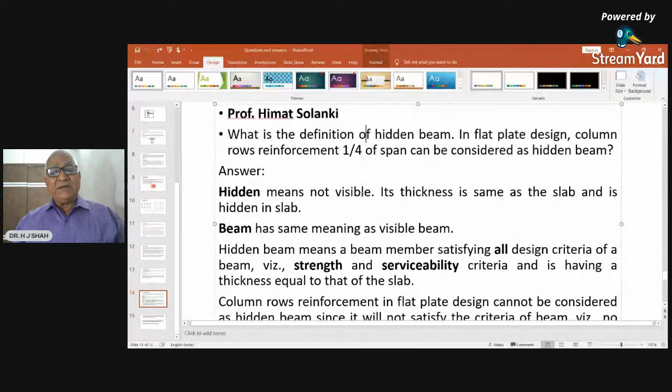Strength and serviceability criteria - so the final conclusion for the hidden beam is that you may provide a hidden beam in the slab to resist or support small partition loads, provided that the strength and serviceability criteria of an open beam are satisfied.

This automatically means that column rows reinforcement in a flat plate cannot be considered as a hidden beam, because it will not satisfy the criteria of a beam - no shear reinforcement, no deflection criteria, because when there is a beam you have to provide shear reinforcement, whereas in a slab we don't provide shear reinforcement. So this will not satisfy the serviceability and strength criteria of a beam. Hidden beam should not be considered capable of acting as a real beam.

And just to clarify this point, I have included this discussion of the hidden beam in this lecture.

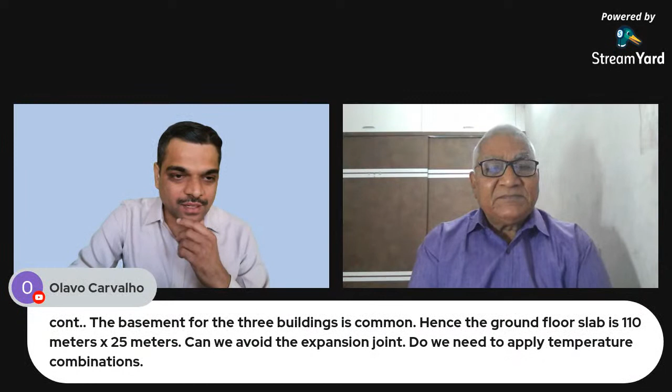One interesting question from Olavo from Goa. He has 3 buildings which have a basement and 6 upper floors, and the basement for the 3 buildings is common. Hence the ground floor slab is around 110 meters by 25 meters - that's the overall dimension of the ground floor slab, and 3 buildings are supported over that. His question is: can we avoid the expansion joint, and do we need to apply temperature combinations in that case?

No, you should not go for that - you must provide the expansion joint. When there is a separation between buildings, and here there are 3 buildings so 2 separations, you can provide the expansion joint at the base. Now, many times people think expansion joint means you need to provide 2 separate columns. But what you can do is provide the expansion joint even in the slab - provide one row of columns positioned so the distance between them is hardly 7 to 8 feet, then project the slabs 3-4 feet and provide a gap of 2-3 inches as the expansion joint. So I think you should go for an expansion joint - there's no alternative to that.

S&V Engineers is asking: whenever a beam is resting on a shear wall in the out-of-plane direction, at that time should we release the moment in the beam, and what is the ideal practice?

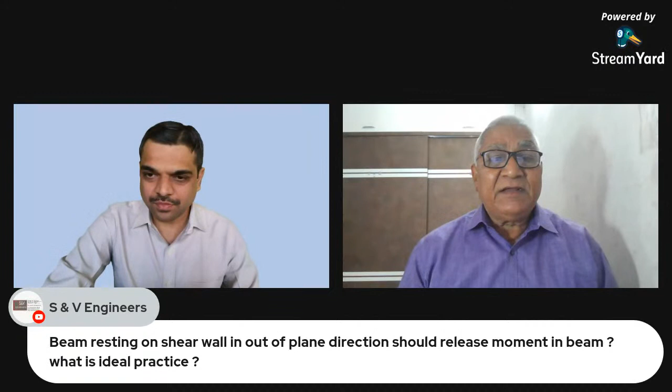Sujit is asking, sir, is it necessary to increase the stiffness above and below the mezzanine floor? So instead of considering above and below, you need to simply see that the upper column should have a lesser or equal stiffness than the lower column.

So if it is not there, then you increase the stiffness of the lower column. Right.

Harsh is asking a common question that comes from everyone: can you discuss torsion irregularity, specifically what to do when the structure undergoes torsion in the first or second mode itself, as in seismic zone 3-4 it is not allowed.

It's a big question, and of course it's out of context for today's discussion. Anyway, he wants to say that he is getting torsion in the first and second mode.

Now, the consulting practice of an engineer definitely depends on his cleverness—how cleverly you are placing the columns and shear walls, etc. So here, if you are getting torsion in the first mode, that is